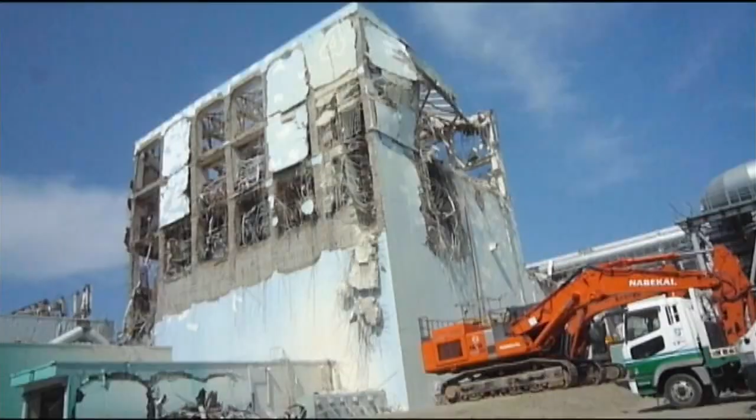To avoid another Fukushima, we should close all nuclear plants. Like the rest of the world, Japan is at a crossroads. Can they get along without nuclear? Sure. The price is going to be very, very high for them. Wind and solar are not going to run the Ginza lights.

How will we power the planet without wrecking the climate? If you really do wish to do something about climate change, nuclear is the path. We don't use nuclear because we got freaked out in the 70s. There are some innovative ideas on the drawing boards.

For my generation, we are much more concerned about climate change and global warming. We're not going to rule anything out because the issue is so important. But given its checkered past, how realistic is atomic power? Are we ready for the nuclear option? Right now on Nova.

Breaking news, a violent earthquake off Japan's northeast coast, an 8.9 earthquake in Japan. It began with an epic earthquake at sea, which spawned a giant tsunami. A 45-foot high wall of water. It rolled over the Fukushima Daiichi nuclear power plant, triggering a cascade of failures.

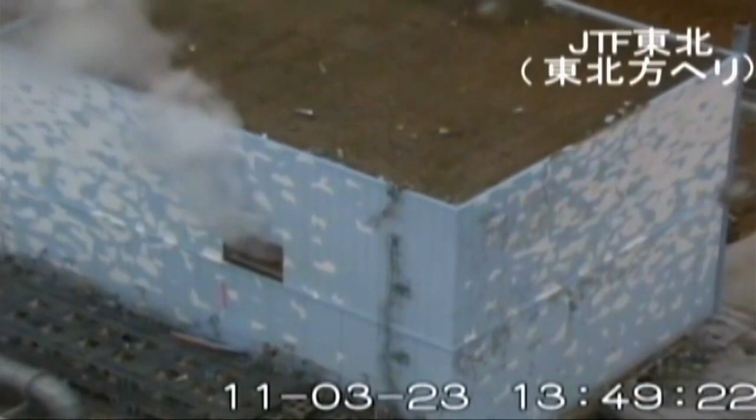3 hydrogen gas explosions. 3 meltdowns. The uncontrolled release of radioactivity into the ocean and into the air. It contaminated a huge swath of land, prompting the evacuation of more than 100,000 people in a 12-mile radius. The worst affected areas, northwest of the plant, remain off-limits, abandoned. No one will be able to live here for a very long time.

As the groundwater passes through the plant, it gets mixed in with the contaminated water that is... It's now been nearly 6 years since the meltdowns at Fukushima. I've been reporting on this since it happened. 6 trips in as many years. I've traveled up and down the desolate evacuation zone. We are about a kilometer from the Fukushima Daiichi plant, getting particularly high readings here, 34 microsieverts per hour.

Victims who lost so much in the earthquake and tsunami in limbo, unsure when or if they can return home. I lost 3 family members, my mother, my wife, and my oldest son. I thought if we fixed the house, we could return here to live. I thought that when we left. But now that I see it, there's no way. No way.

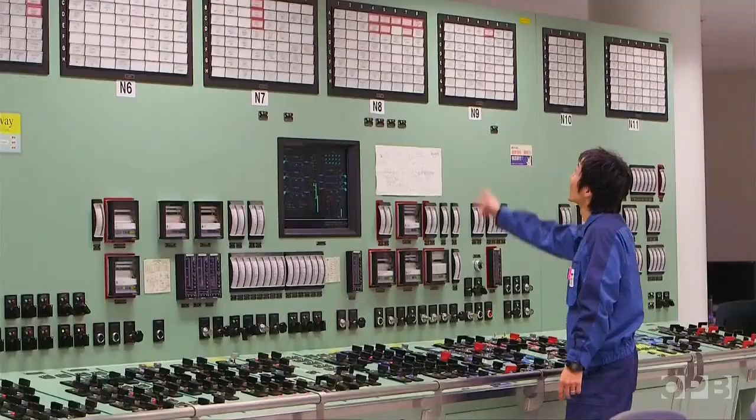The owner of Fukushima, the Tokyo Electric Power Company, or TEPCO, is pushing hard for permission to restart another sprawling nuclear power facility on the west coast of Japan. The Kashiwazaki-Kariwa atomic plant is the largest in the world, or was. Today at KK, the operators are simulating disasters, but the plant remains closed like nearly every other nuclear power facility in Japan.

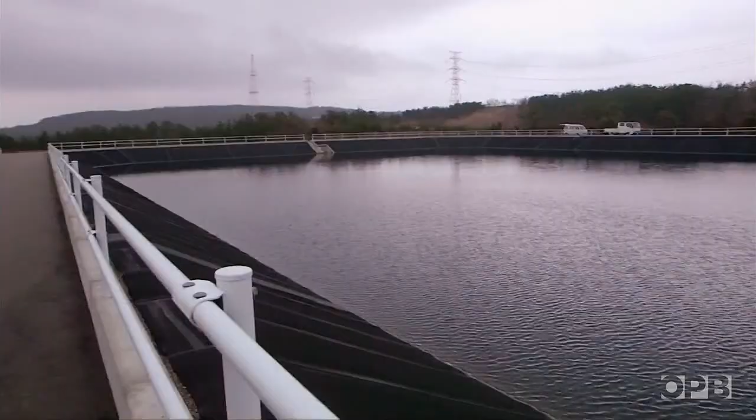After the meltdowns at Fukushima, TEPCO invested heavily in safety upgrades here. A 50-foot-high seawall and watertight doors. On high ground, a fleet of backup generators and fire engines, and a 5 million-gallon holding pond designed to keep water flowing down to the reactor cores as a last resort. The price tag, nearly $5 billion.

Despite all of that, the prefectural governor is opposed to a restart, as are most people who live here. I have young children. In my opinion, nuclear plants should be eliminated. Honestly, I don't want them to resume. With the impact of Fukushima, I don't want to use nuclear plants in the future.

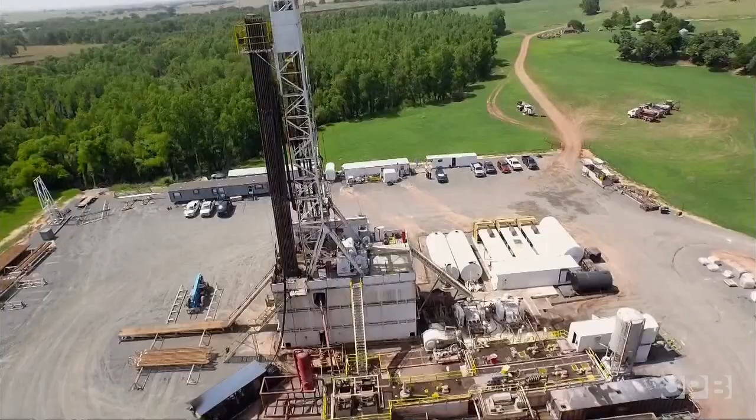Before the Fukushima disaster, Japan derived 30% of its electricity from 54 nuclear reactors. There were extensive plans to build 14 more. The goal? Generate half of their electricity with nuclear by 2030. Now the nation relies on imported fossil fuels to fill the gap. Japan is at a crossroads, and so is the rest of the world. How can we answer the relentless demand for more energy without burning fossil fuels, the chief culprit in global warming?

Unlike fossil fuels, nuclear is a potent source of energy that does not generate any of the greenhouse gases, like carbon dioxide, that trap heat in the atmosphere, warming our planet. A nuclear reactor is fueled by uranium, an element that naturally splits apart, releasing atomic particles called neutrons. It's called fission, and uranium fission can induce more fission. When a loose neutron fires into a nearby uranium nucleus, the atom becomes unstable and quickly splits.

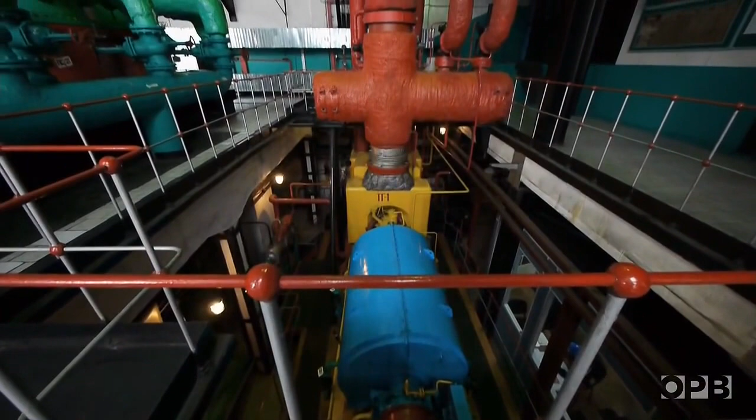Each time an atom splits, it generates heat. It's used to boil water. The steam turns turbines, generating electricity without releasing any carbon dioxide into the atmosphere. Renewable sources of energy may seem like safer, simpler ways to generate carbon-free power. But without a practical means of storing what they produce, are they reliable enough?

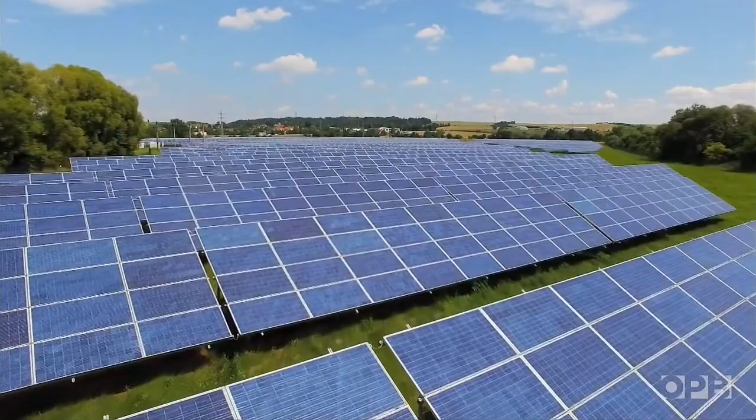We expect electricity on demand. What happens when the sun doesn't shine? What happens when the wind doesn't blow? We don't have a battery technology that can meet the rigorous performance requirements of the grid, namely super low cost and super long service lifetime.

Wind and solar have been growing rapidly, but we have so little storage now that even if it grows very rapidly, it'll be a long time before it has a big impact. We need to have baseload carbon-free power. And nuclear is a great example of something that is baseload carbon-free power.

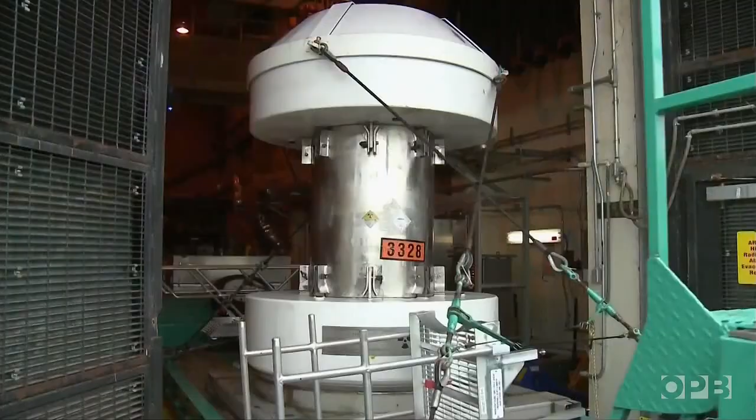But since the dawn of the nuclear age, that signal means to stop whatever you are doing and get to the nearest safe place fast. Fear of atomic bombs, radiation, and concerns about storing the radioactive waste have made nuclear power seem too risky.

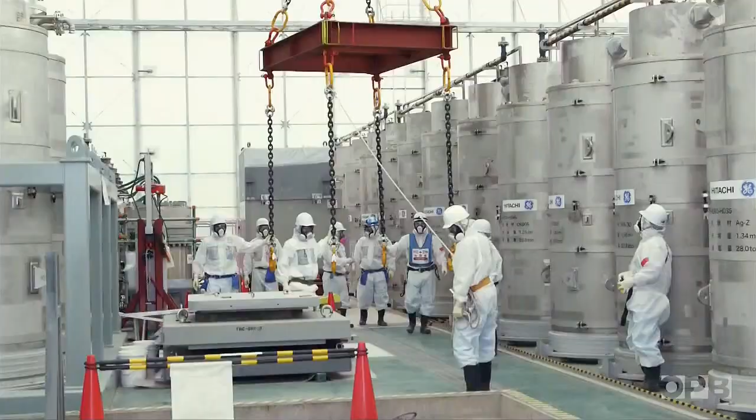Radioactive contamination has gone down, but not nearly enough to dispense with the Tyvek suits, 3 layers of socks, and gloves, and full-face respirators. 4,000 workers endure the ritual every day. They work long and hard without access to water or a toilet. It's like being an astronaut on a spacewalk. But this mission is less scripted and rehearsed. There is no playbook.

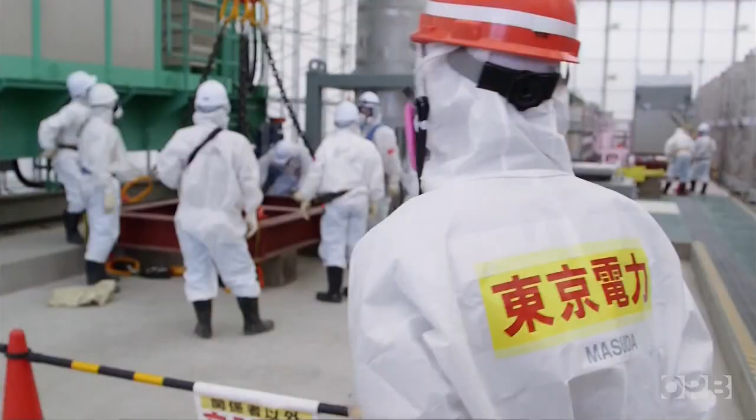The biggest challenge is that we've never done anything like this. No one in the world has this experience. Naohiro Masuda is TEPCO's chief decommissioning officer, the man in charge of this unprecedented cleanup. It's neither a job he sought nor could have imagined when he began working for the utility 30 years ago. My generation joined the company to generate electricity with nuclear power. That was our purpose in life.

So when it comes to decommissioning work, I feel there's a bit of a dilemma, like, what is our goal here? And we still need to decide what we're going to do. For that, we need to rely on the knowledge of people around the world. He relies heavily on this man. For them to come out and to publicly say we need help is different for them.

Lake Barrett is one of a very select group who has some experience with a job like this. It was an accident at the Three Mile Island nuclear power plant, which is... The Nuclear Regulatory Commission appointed him to manage the decommissioning of Three Mile Island Unit 2 after it melted down in 1979, releasing a negligible amount of radiation into the atmosphere.

There's a lot of similarities between TMI and Fukushima, and there's also a lot of differences. Fukushima is much more complex, the damage is much greater, there's 3 melted cores, but the fundamentals of how you address this and how you recover are similar. We are now 5 feet into the core. Boy, a lot of debris.

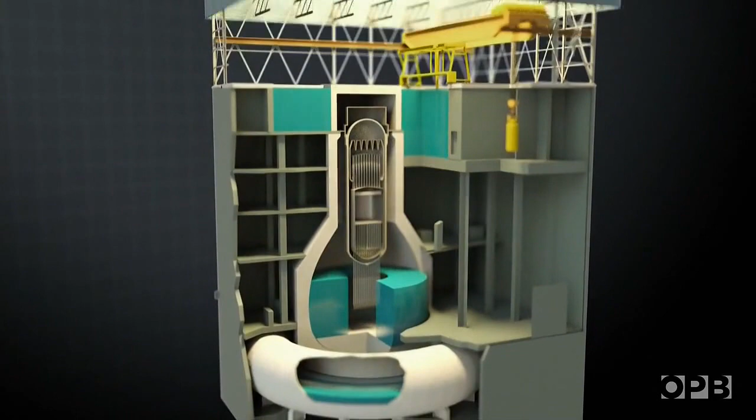So where is the melted fuel at Fukushima? In the type of reactors that were built there, the uranium fuel sits inside rods, underwater, in a steel pressure vessel, surrounded by a concrete and steel containment structure inside a reactor building. All those layers of protection are there in case the cooling water stops flowing. If that happens, it quickly boils away, exposing the fuel, and it melts, turning into radioactive magma.

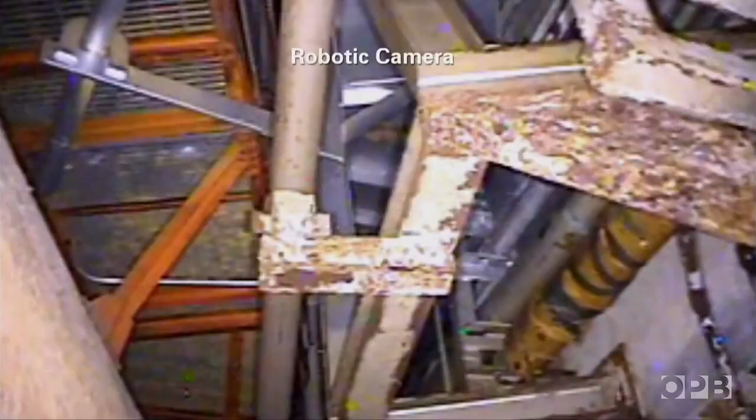Engineers have sent robotic cameras into the containment structure to try to get a glimpse. But the cameras quickly fail after they are bombarded by radiation. They do know the damaged cores are inside their containment structures, but it is likely that they melted through the reactor pressure vessels onto the concrete floor below.

Is it in one big vertical lump on the floor underneath it, or did it come down and flow like lava in a volcano and move out to the sides? We don't know yet. Answering the question won't be easy. It's just too hazardous to get anywhere near the melted fuel.

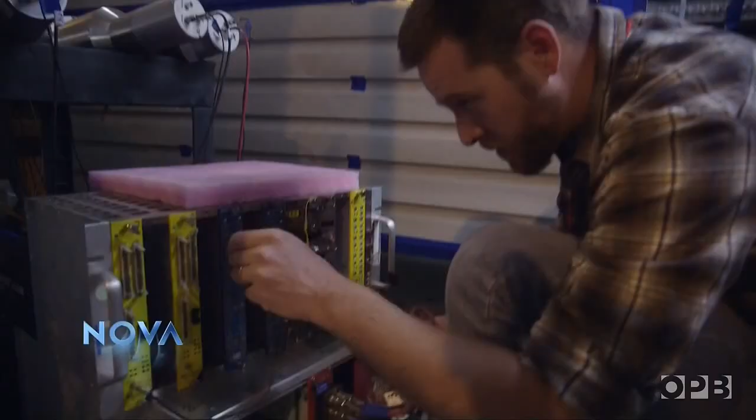But a team of scientists and engineers from the Los Alamos National Laboratory is helping TEPCO get some answers.

Channel 7's on. Channel 7's on.

They are building a sensing device that detects muons, which begin as subatomic particles in outer space before reaching the Earth's atmosphere. They can be used as a tool to see the melted uranium fuel. Muons are stopped, slowed, or deflected, depending on the density of the matter they are passing through. Muons are like heavy electrons. They don't have a nuclear interaction.

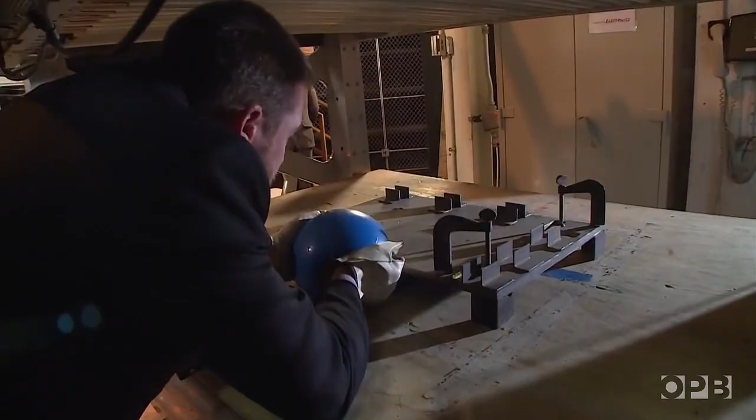In this demonstration, they used muon detectors to create an MRI-like image of this half-sphere of lead. At Fukushima, muon detectors like these, placed strategically around the very dense uranium cores, can work together to pinpoint the location and shape of the melted fuel. The technique works in simulations.

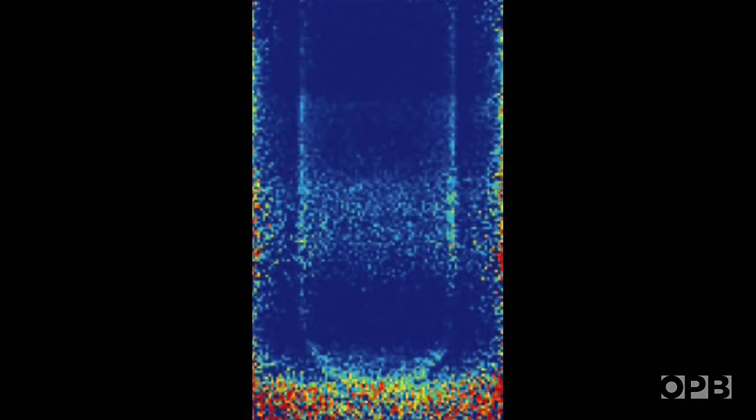We can see where the core was, we can see the bottom of the pressure vessel, and we can see if there's material in the core region, if there's material that's in the bottom of the pressure vessel. And we can actually measure if there's any uranium there, if there's a lot of uranium there, how much is left. So this is really good news.

The detectors will be run for months to gather sufficient data to give engineers the sharpest possible picture inside a lethally hazardous place that none of them can ever visit. At Fukushima right now, the most urgent problem is water. A steady torrent of radioactive water.

The plant is wedged between a mountain range and the Pacific. When the rain falls, it flows toward the ocean on the surface and underground. The earthquake on March 11, 2011, created numerous breaches in the basements of the reactor buildings. To keep the melted uranium cores cool, TEPCO pumps in 100,000 gallons of water each day.

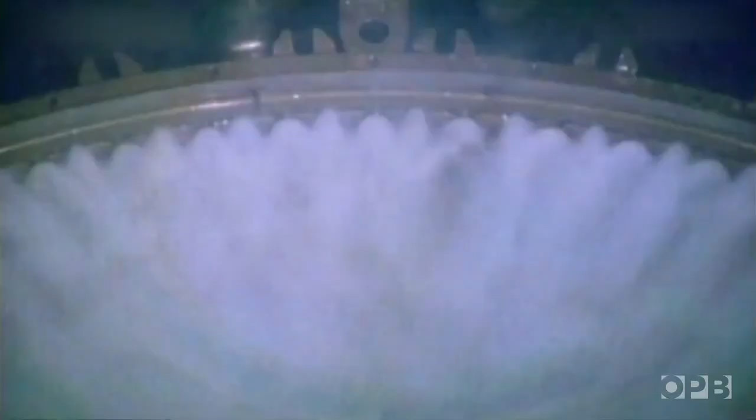The water touches the core, becomes highly contaminated, and flows out through these penetrations that are leaking onto the floor of the reactor building. That's where it mixes with groundwater that has seeped into the basement. 100,000 gallons of water is contaminated each and every day.

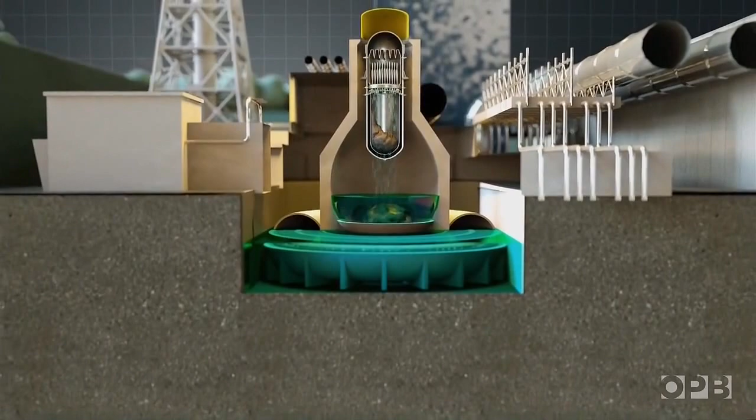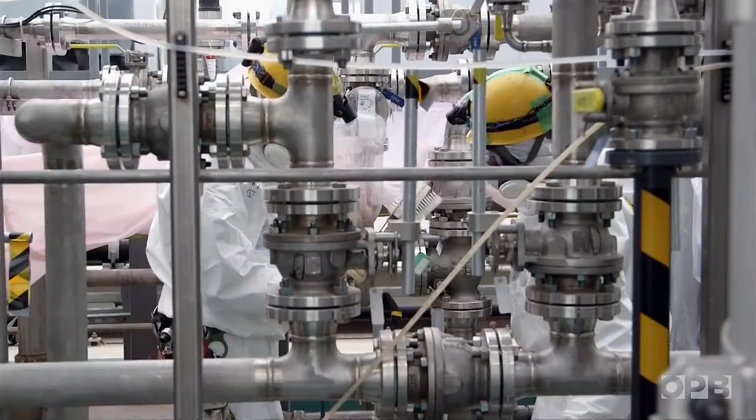To keep it from leaking into the ocean, they employ a network of pumps, sending the water through a series of huge filtering plants that use various types of fine-grained materials that naturally attract and bind with radioactive elements. They remove cesium, strontium, plutonium, and about 60 others. All that remains is a radioactive form of hydrogen called tritium.

Tritium is very hard. It's in water itself. That's something that you just can't remove by any methods that I know of in a straightforward way on that scale. So they're going to have to release it. Dangerous as that may sound, scientists say the risk is relatively low. Tritium was not released in very high quantities from Fukushima relative to what we released in the atmosphere in the 1960s when we blew off hydrogen bombs.

There was a lot of tritium put into our ocean, so we're going to be adding in a small amount of tritium to an ocean that already has tritium in it. In the meantime, they are storing the tainted water in tanks. Lots of tanks. They have to finish construction of a new one about every other day to keep up.

A plateau above the destroyed reactors now brims with more than 1,000 of them. They hold more than 264 million gallons of water. While TEPCO has enough space to keep building them for years, it is clearly not a sustainable solution. And yet the government has refused to issue a permit that would allow the utility to drain the tanks.

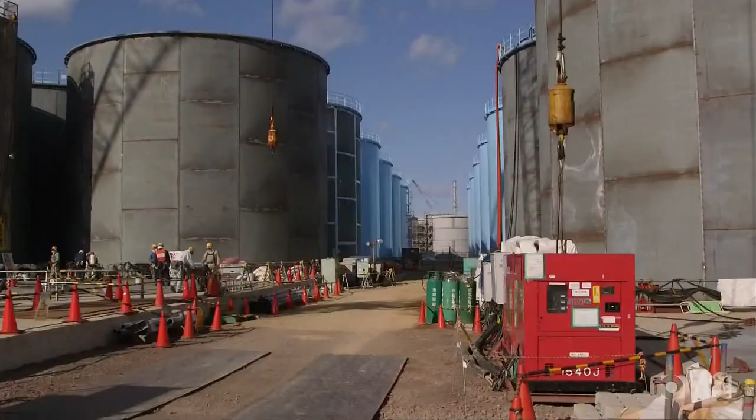To get there, they're going to have to rebuild the public confidence that they understand and trust the people that are telling them these messages, and ultimately that people realize you can't just keep building tanks, right, forever. There has to be a limit. Meanwhile, TEPCO is desperately trying to reduce the amount of groundwater that becomes contaminated in the first place.

They have encircled the damaged reactors with 1,500 pipes that go 100 feet deep. They are filled with coolant that is 22 degrees below zero, creating a mile-long underground barrier of frozen soil. The hope is it will deflect the groundwater away from the melted fuel. But why ice?

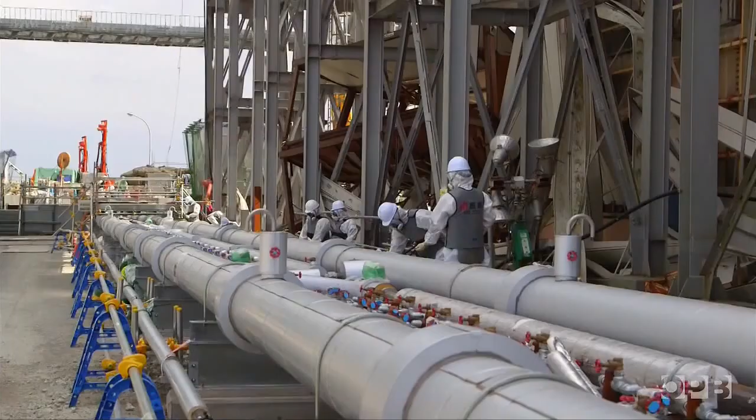When my boss told me that I was being assigned here, I had my doubts. But there are a large number of buried pipes and cables around the nuclear reactor buildings. So it's not possible to use a continuous wall of steel or concrete underground.

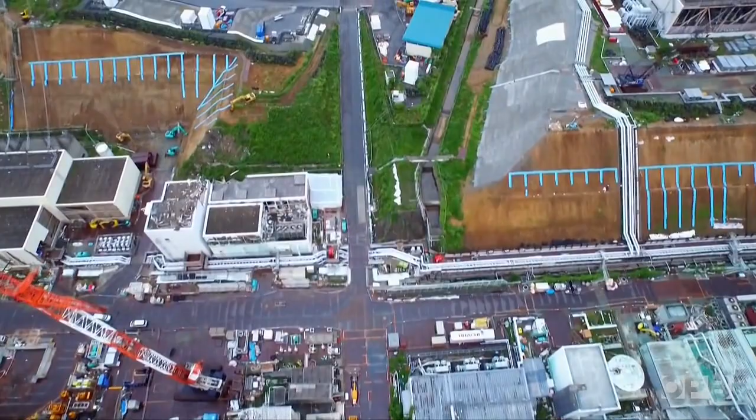The technique is routinely used on construction sites to temporarily stabilize the ground. But nothing at this scale, designed to work for years, has ever been tried before. My concern is if you have water flowing through the site and you build a barricade, does TEPCO really understand where that water goes? Is it going to go over the wall? Is it going to go under the wall? Is it going to go around the wall?

In March of 2016, they turned it on, but the groundwater is still seeping in. No one knows if it will ever work. The engineers here face huge challenges ahead. The job won't be finished for 30 or 40 years. Nothing of this magnitude has ever been done before. It can be done, I believe, with the technologies that exist and will be developed as we go forward. But no, nothing of this magnitude has ever been done by mankind.

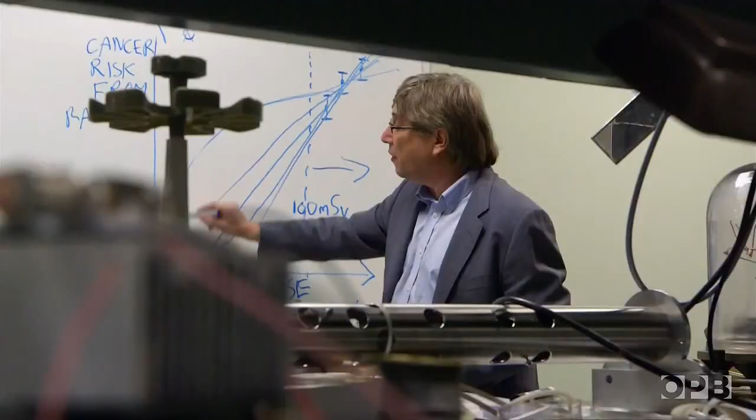They are being watched by a scared, skeptical populace. And unfortunately, scientists can offer little reassurance. Biophysicist David Brenner is director of the Center for Radiological Research here at Columbia University Medical Center. In my opinion, everybody who lived in Fukushima Prefecture and even outside who got some very low level of radiation exposure, and that's pretty well everybody, would be subject to a very small increase in cancer risk.

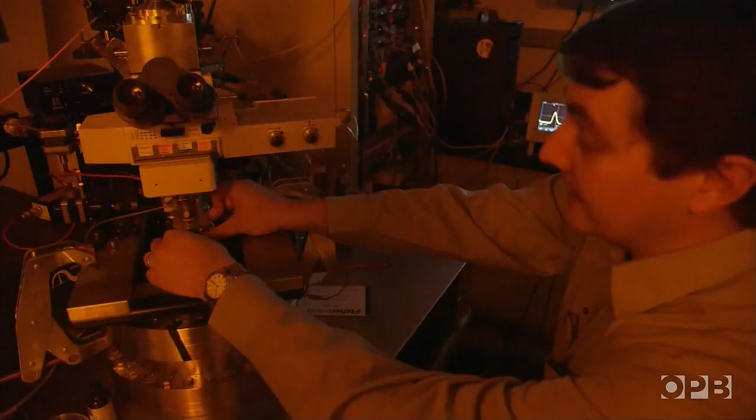But beyond that, scientists cannot say anything conclusive about their long-term risk of developing cancer or genetic defects. The individuals in Fukushima Prefecture want to know what are the real effects of the radiation that I was exposed to. And we can't give them the answers that they need, and that's a really unfortunate situation. I personally find it a very frustrating situation. About 18,000 people died as a result of the earthquake and tsunami on March 11, 2011. But no one has died by radiation from the meltdowns.

So is the lesson of Fukushima to stop or to build better, safer nuclear plants? Plants that employ a host of new technologies that matured long after most of our current fleet of nukes was designed. I think the right interpretation of the accident at Fukushima is we should go all out on nuclear innovation. If the Japanese had replaced these elderly plants with modern plants, Fukushima wouldn't have happened.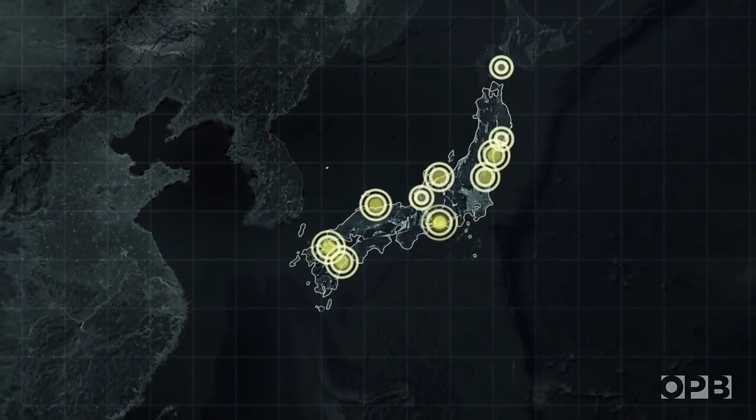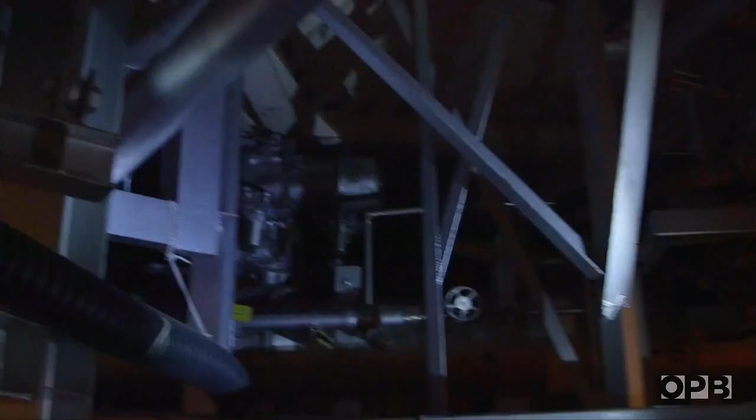In all, there are about 450 nuclear reactors generating 11% of the planet's electricity. In the US, nuclear power fills about 20% of the nation's power demand. The vast majority of nuclear power plants were built with technology and techniques from the 60s and 70s and are water-cooled. Despite steady improvements over the years, water-cooled reactors still have a serious vulnerability: a station blackout that stops the crucial pumps that keep cooling water flowing. This is what happened at Fukushima.

To make fission robust enough to generate power, uranium is enriched, shaped into pellets, and then stacked into fuel rods. This ensures lots of uranium atoms are close enough to each other to allow a healthy chain reaction. To manage the rate of the reaction, control rods that absorb neutrons are moved in and out of spaces among the fuel. During an emergency shutdown or scram, the control rods are pushed all the way in, terminating the chain reaction.

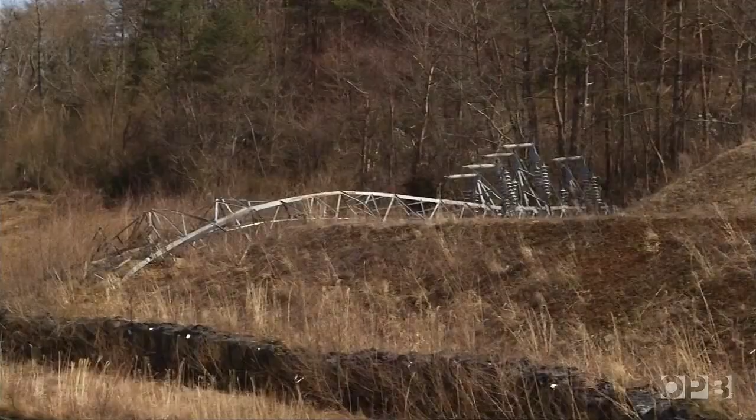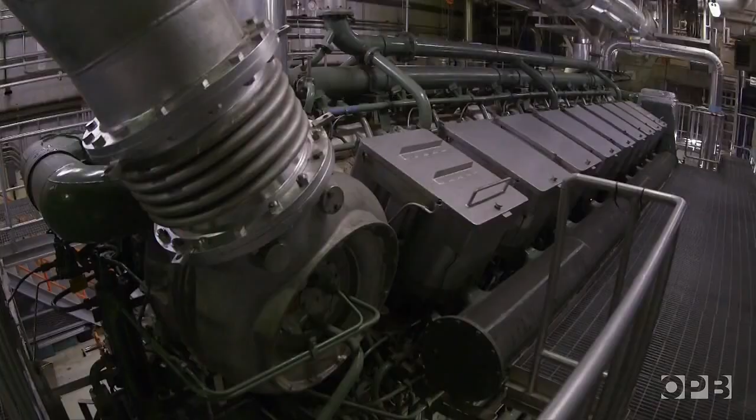The earthquake of March 11, 2011 prompted an automatic scram at Fukushima. But it also brought down the crucial transmission lines that connected the plant to the power grid. Then the tsunami waves wiped out the emergency backups, the generators and batteries designed to keep electric pumps pushing water over the reactor cores while they cooled down. Currently, the existing fleet of reactors use pumps and diesel generators and AC and DC power to provide the cooling to the nuclear reactor core. If you lose connection to the grid, essentially you have no way of cooling that core.

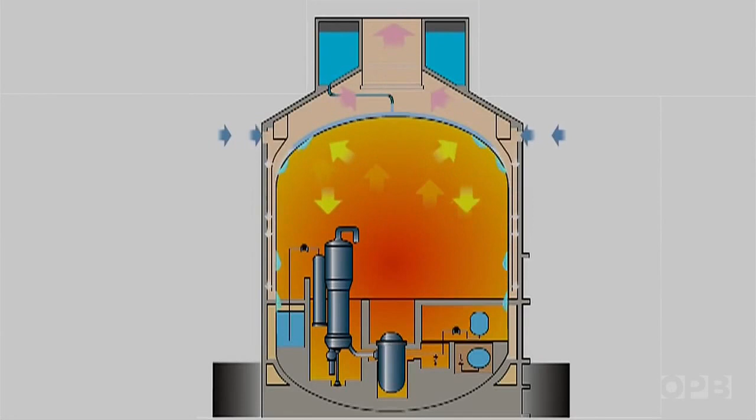Some of the results from that... Jose Reyes is a nuclear engineer at Oregon State University. In the early 2000s, he and his team partnered with Westinghouse Toshiba to design the prototype for a new generation water-cooled nuclear reactor called the AP1000. It has an emergency water reservoir above the reactor. It is designed to prevent a meltdown for as long as 72 hours, using gravity and convection, but no electricity. If the reactors at Fukushima could have coped for that long, the meltdowns would not have happened. 4 of these AP1000s are now under construction in Georgia and South Carolina, and 4 more in China.

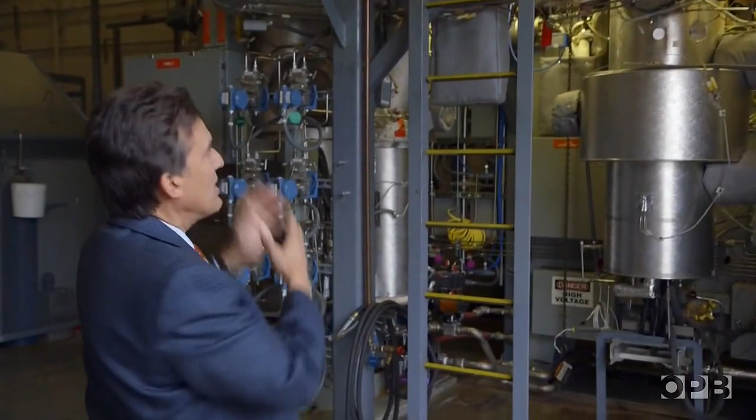So what you're looking at here is the reactor vessel in the center. But more recently, Reyes is focused on smaller, and he thinks better things. He is the co-founder and chief technology officer for an Oregon-based company called NuScale.

In our design, the reactor vessel sits inside the containment, and then that whole system, the containment and the reactor vessel, sits underwater, underground. And that's the whole safety system for this plant. NuScale reactors are small and modular, designed to be operated in clusters, completely submerged in a 4 million-gallon pool of water. Each can generate about 50 megawatts of electricity, enough to power nearly 40,000 homes.

So 12 of them linked together could service 450,000 homes, or about as much as a conventional nuclear power plant. As we've gone through the patent process, some of the patent examiners have said, this is too simple. How is this possible that this hasn't been done before?

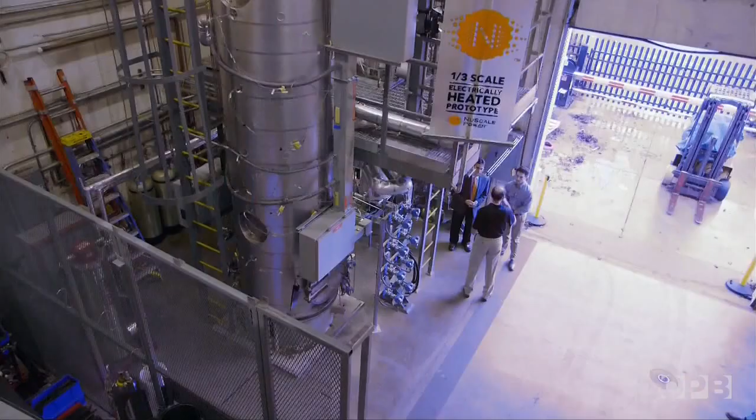Unlike Fukushima, where critical coolant pumps had to keep running for the reactors to cool down, NuScale has designed a plant that requires no pumps and no electricity at all. So a lot of these are tied to actual valves. Okay. Right now, they are still trying to validate the concept and clear the massive regulatory hurdles.

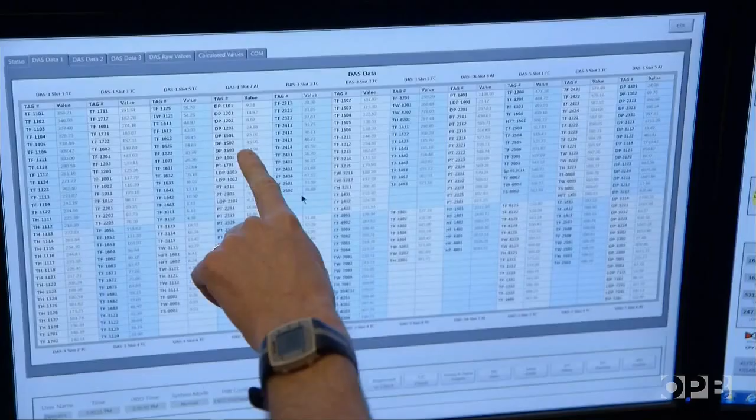It will take many years, but NuScale already has a customer, the Utah Associated Municipal Power Systems. The plant will actually be built across the state line in Idaho, at the federal government's premier nuclear power test site, a storied place emerging from a long nuclear winter.

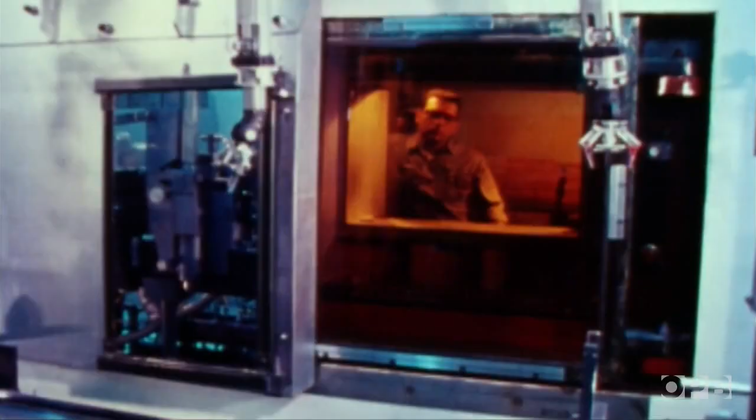When I came to Argonne in 1963, I was then 28, 29 years old. The world was my oyster. When Chuck Till first came to the Argonne National Laboratory, it was a great time to be a nuclear physicist, a golden era. A lot of things had been discovered, but very many had not. The things that would be necessary for civilian nuclear power to be a success basically had not been explored. And at Argonne, you were right in the center of it.

Argonne's vast testing site in the Idaho desert is ground zero for nuclear power generation. More than 50 novel reactor designs have been built and tested here since 1949. It is hallowed ground for nuclear engineers. The beginnings of nuclear power were here. The beginnings of useful nuclear power were here.

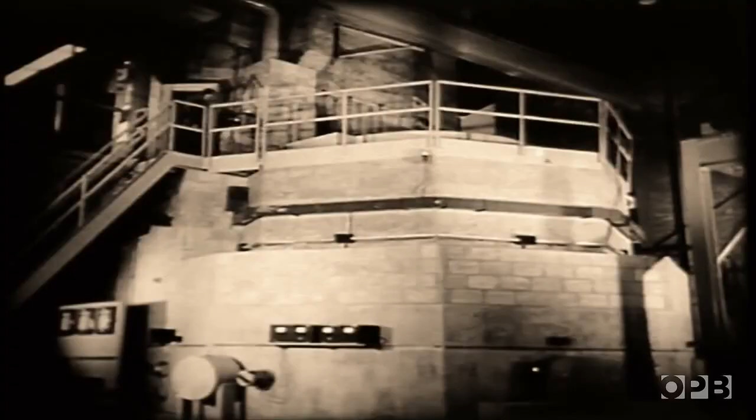At 1:50 p.m. on December 20th, 1951, four 200-watt light bulbs started burning here with electricity generated by the experimental breeder reactor number 1, the first ever nuclear power plant. Besides the fact that it proved splitting atoms could generate power, it also demonstrated a very clever way to do it.

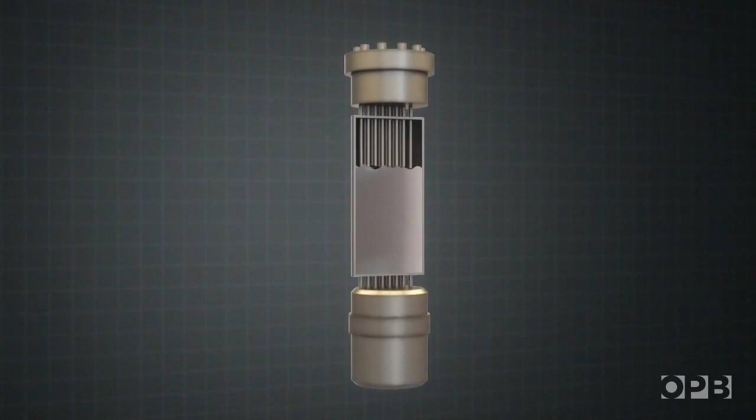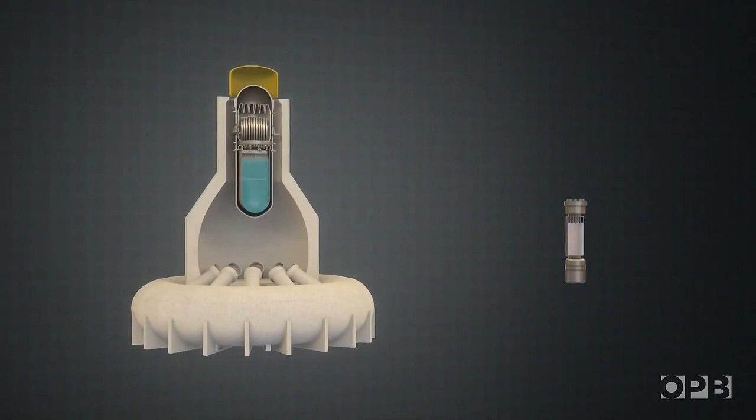The fuel was cooled with liquid metal, sodium mixed with potassium, which has a low melting point. It absorbs more heat and has a much higher boiling point than water. It meant the reactor did not need to be encased in a thick steel pressure vessel designed to keep water in liquid form like a pressure cooker. It was inherently safer, or so the scientists hoped.

They built this reactor to test the concept, experimental breeder reactor number 2. The experimental breeder reactor number 2 is a reactor that's known to all nuclear programs around the world. It is a full-scale plant, and it proved all kinds of firsts in nuclear power. It's now about 5 minutes till test time.

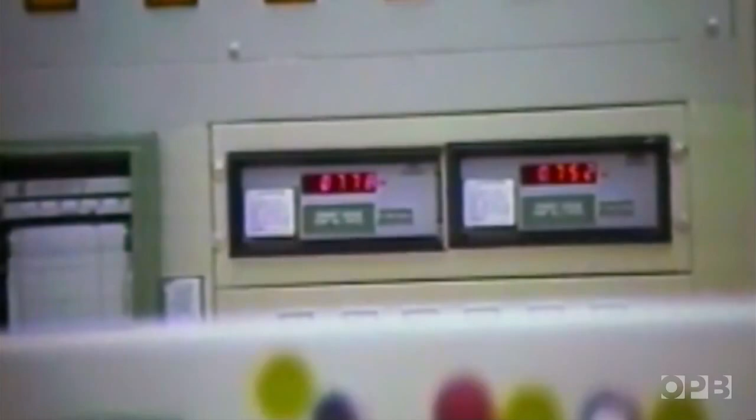It made history on April 3rd, 1986. 1 minute till the test. When they staged a bold demonstration of how a liquid metal reactor can handle multiple failures. 3, 2, 1, start. In the turbine hall was an assemblage of people that came from all over the world. They had nuclear programs, and they wanted to see this because the reactors don't behave this way. Reactors can't be relied upon to shut themselves down.

The first demonstration foreshadowed Fukushima, a station blackout and a loss of coolant flow to the hot nuclear core. Mark! They just shut off the coolant supply. And I mean, do that in a normal reactor, you'd have an explosion. You could see the power going straight up. The next thing, of course, is everybody's head swiveled back to where we were, the Argonne people were, wondering, are they running?

The demonstration went as hoped. The power trace went up like that, came down well below where it had to come down, and the reactor just quietly shut itself down. Deprived of any cooling, this reactor did not melt down or explode. But how?

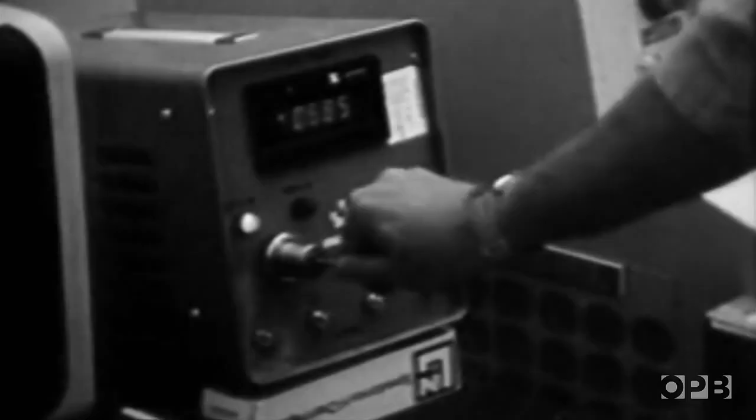Remember, to sustain a healthy chain reaction, uranium atoms must be close enough to each other so the neutron bullets can hit their targets. When the liquid sodium coolant pumps stop, the temperature initially rises, expanding the reactor core, dispersing the uranium atoms. As a result, the chain reaction is reduced, causing the temperature to go down. So the laws of physics and the robust cooling capacity of liquid sodium metal bring it automatically to a safe shutdown.

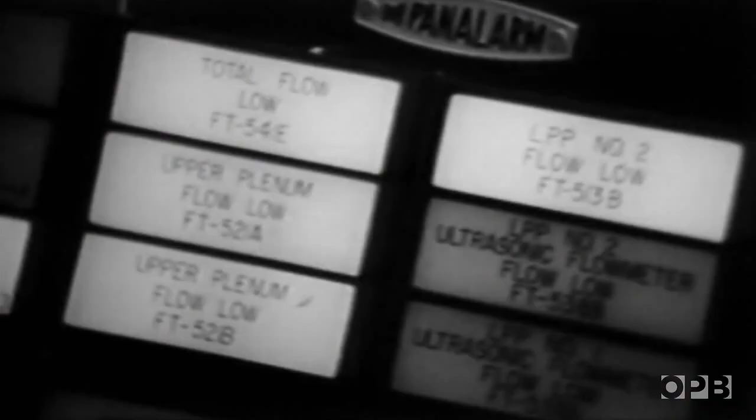At the time of that dramatic test, Chuck Till thought this was the dawn of a new era. He envisioned widespread commercial use of sodium reactors based on this design. Absolutely. The world was going to need massive amounts of energy, and here was the way. There was no doubt. Sodium-cooled reactors, properly designed, are safer. I say that without question. So why don't we have them? We were stopped.

There has been a nuclear accident at the Chernobyl atomic power plant.

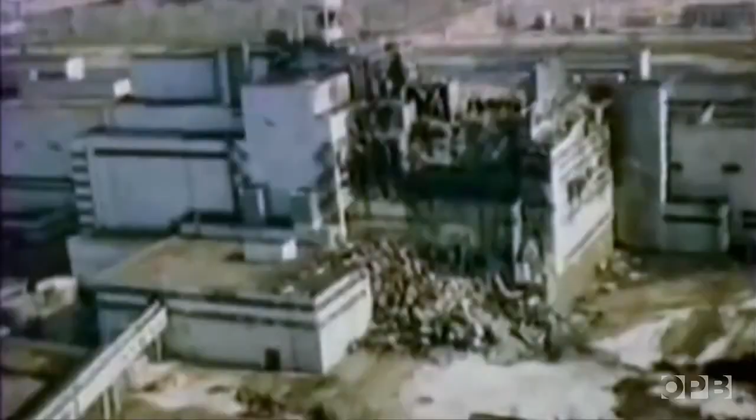A few weeks after that demonstration, a reactor at the Chernobyl nuclear power plant in the Soviet Union blew up during an ill-conceived test. Chuck Till's success was totally eclipsed. All right.

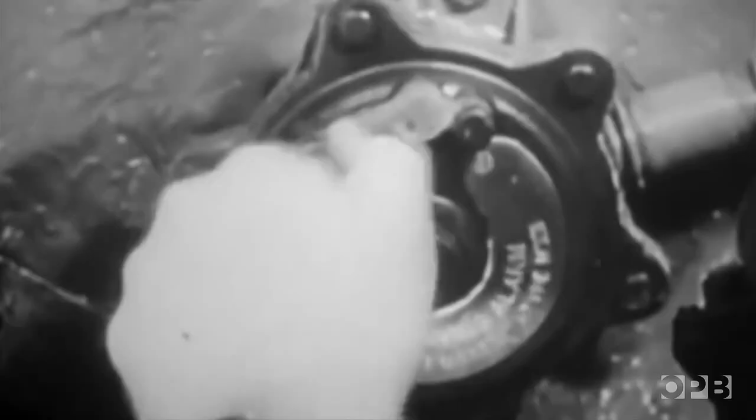This is a model of the Navy's first nuclear-powered submarine, the Nautilus. But the seeds of the demise for sodium reactors were planted many years earlier by this man, Admiral Hyman Rickover, the father of the nuclear navy. This is the reactor, or the atomic pile. There's uranium in here. He selected nuclear reactors cooled with water to propel the Nautilus, the first nuclear-powered submarine. The design made a lot of good sense for the Navy. It was the right mix of size, simplicity, and safety. Among other things, sodium explodes when exposed to water. The huge Pentagon investment in the research and development of this technology gave it a big leg up on other ideas, including liquid metal reactors.

About the same time, President Eisenhower delivered his famous Atoms for Peace speech at the UN. So my country's purpose is to help us move out of the dark chamber of horrors into the light. He hoped to change the way the world thought about splitting atoms, from bombs to light bulbs. He wanted to export U.S. nuclear power technology, and he was in a hurry to beat the Soviets. Adapting the nuclear Navy technology for use on land offered the fastest path to market.

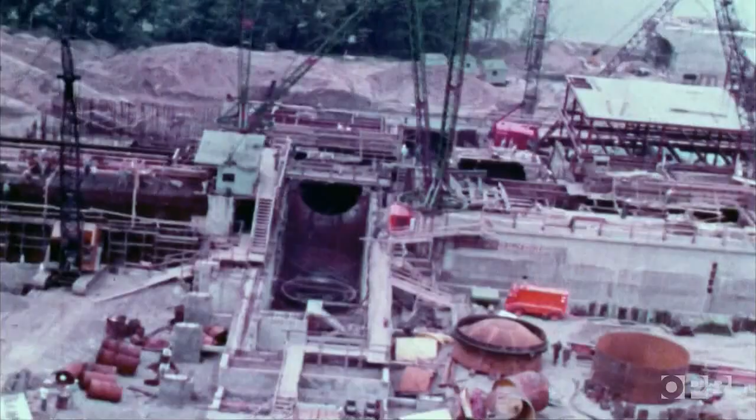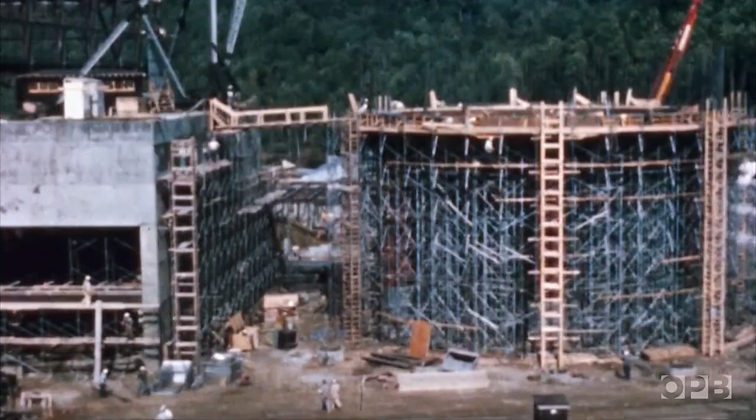In 1957, the first commercial atomic power plant in the U.S. opened near Pittsburgh, in Shippingport, Pennsylvania. Admiral Rickover personally oversaw the design and construction. Very quickly, reactors cooled with water became the norm. For 20 years, utilities went on a nuclear building binge. But then, in the 1970s, environmentalists took aim at nuclear power. The fear of radiation and the inextricable link to atomic weapons and their proliferation changed the equation. Protesters viewed nuclear power as inherently unsafe, too complex, and costly. And indeed, as the safety regulations increased, so did the cost of building the plants.

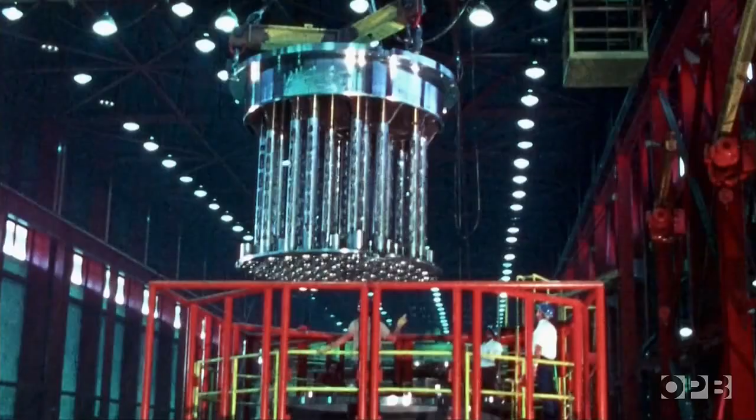The Achilles heel of nuclear power is that you can't protect against every conceivable accident. You can put a lot of extra safeguards into place and really lower that uncertainty as much as you can, but that will raise the cost of nuclear power when it's already unaffordable. By the mid-70s, the Atomic Energy Party was winding down. And then came the movie.

This is Jack Godell. We have a serious condition. You get everybody into safety areas and make sure that they stay there.

The China Syndrome premiered on March 16, 1979. It is the story of an evil corporation cutting corners, leading to a nuclear meltdown.

The number of people killed would depend on which way the wind is blowing. Render an area the size of Pennsylvania permanently uninhabitable, not to mention the cancer that would show up later.

12 days later, in Pennsylvania, life seemed to imitate art at Three Mile Island. The seriousness of the meltdown there unwittingly embellished by Hollywood. Support for nuclear power evaporated. Still, in the Idaho desert, Chuck Till's EBR-2 kept going, running safely for 30 years.

Mr. Speaker, the President of the United States!

But it was better at sustaining fission than political and popular support. The program was canceled by President Clinton in 1994.

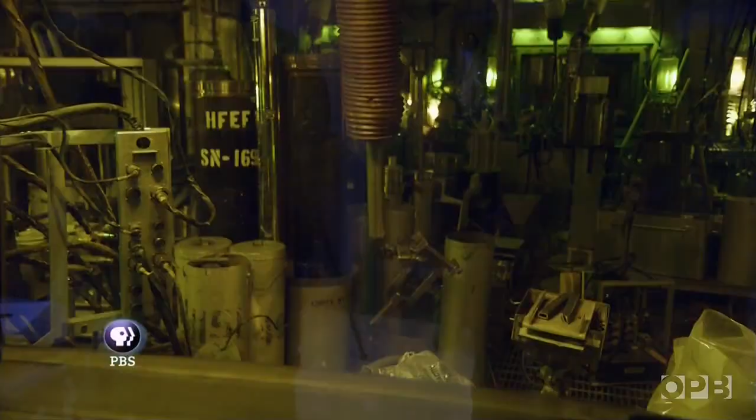But now, more than 20 years later, the intensive search for carbon-free power is prompting a fresh look at new nuclear technology. In the face of climate change reality, the money is starting to flow in this direction again. The federal government has placed some new bets on nuclear innovation. In Idaho, they are taking some of the old test reactors out of mothballs.

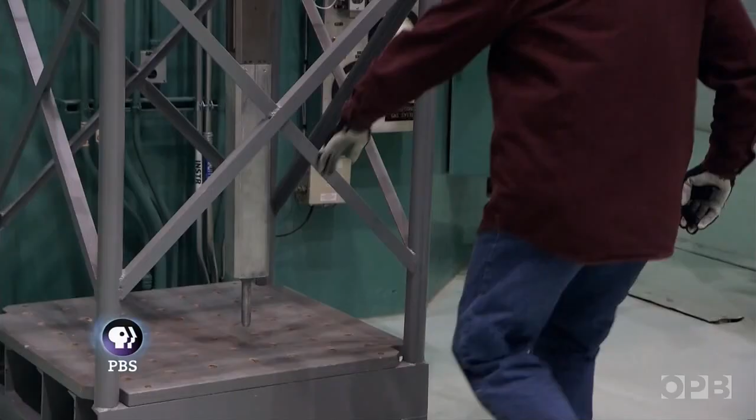The fact that we're restarting that tells us that we're restarting a testing infrastructure to start to develop the next generation of nuclear power. Argonne's test site is now called the Idaho National Laboratory. Its director, Mark Peters, oversees several partnerships with the private sector to improve technology, the state-of-the-art in water-cooled reactors known as Generation 3.

But the main goal is to commercialize Generation 4. Generation 4 are future reactors that are based on different concepts, different core designs, different coolants. I'm quite excited about where we're at today. And so is his predecessor, Chuck Till.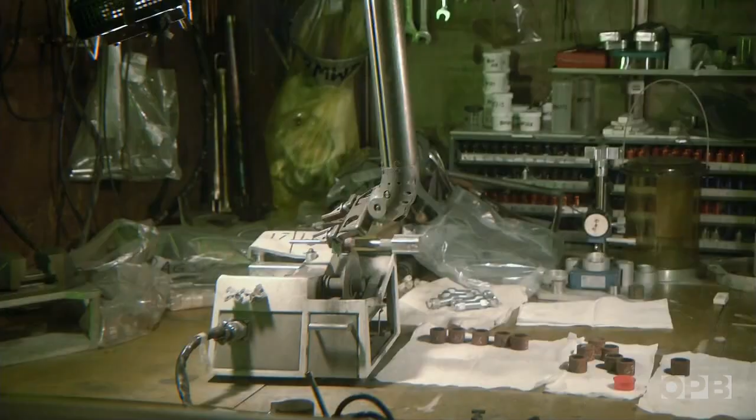It surprises me when I go on the internet and see how many allusions there are to the things that we did. And I hope that the work that my colleagues have done in that decade from 1984 to 1994 pays off. The nation has fumbled around, in my view, for 20 years unnecessarily. But now Chuck Till's vision may finally be gaining some critical mass.

I'm going to talk today about energy and climate. This time, one of the drivers for nuclear power technology is not an admiral, but rather a captain of industry. And so what we're going to have to do at a global scale is create a new system. Microsoft founder Bill Gates is among a handful of entrepreneurs with seemingly bottomless pockets, making big bets on nuclear power. At a TED conference in 2010, he publicly announced he had co-founded a company called TerraPower.

Nathan Myhrvold and I actually are backing a company that perhaps surprisingly is actually taking the nuclear approach. His partner is his former chief technology officer at Microsoft, Nathan Myhrvold. When we first started investing in TerraPower and getting it going, we had a lot of people come and look at us, kick the tires. That was the era when Silicon Valley was into clean tech. And they all said, oh my God, this is risky.

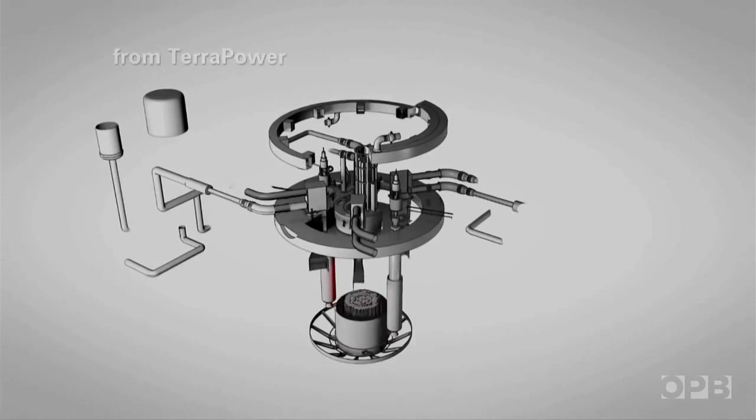But Bill and I thought that it being risky doesn't mean you shouldn't do it. In fact, perversely, that's exactly when you should do it. It's when everybody else says, no, I can't do it. It's something that is a risk that's not for the faint of heart. Here they are working on a 21st century take on sodium reactors.

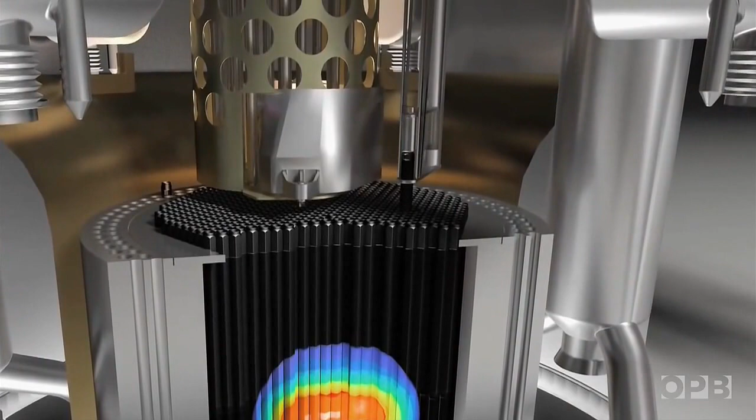It is designed to run without reprocessing and refueling. With a TerraPower reactor, you fuel it, and you don't take them out for 60 years. During that period of time, you'll get enormously more energy out than you would get from the same uranium if you put it in a conventional plant. Unlike water-cooled reactors, this one does not need the equivalent of premium gas, uranium that is refined to greater potency in a complex, expensive process called enrichment.

But the enrichment process has leftovers. The biggest stockpile in the U.S. is here in Paducah, Kentucky, at a uranium enrichment plant. These leftovers, called depleted uranium, can be used to fuel the TerraPower reactor. If this works, it would be a game changer for nuclear power, in part because it would virtually eliminate the need to store spent nuclear fuel, one huge unresolved problem.

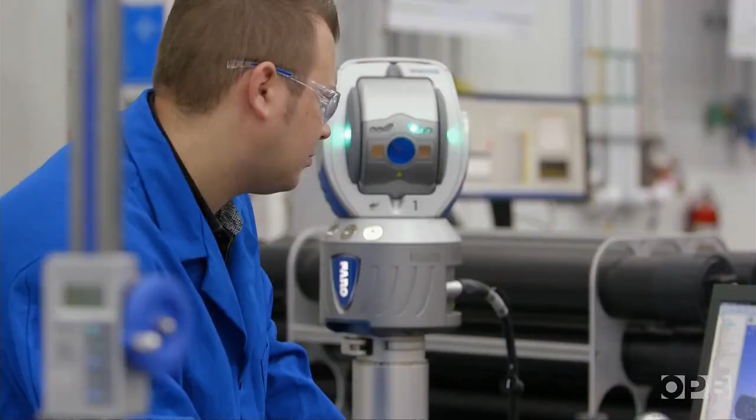With our reactors, Paducah, Kentucky becomes the energy capital of the United States. Because Paducah alone has enough of this low-level nuclear waste, the depleted uranium, that we could run all of America's electricity needs for 750 years. But TerraPower faces big regulatory hurdles.

The Nuclear Regulatory Commission is accustomed to licensing water-cooled reactors. When it comes to innovative technology like this, the rules haven't even been written. So TerraPower has found a customer that is less constrained by regulation and public relations: China. It's where its first plant will be built.

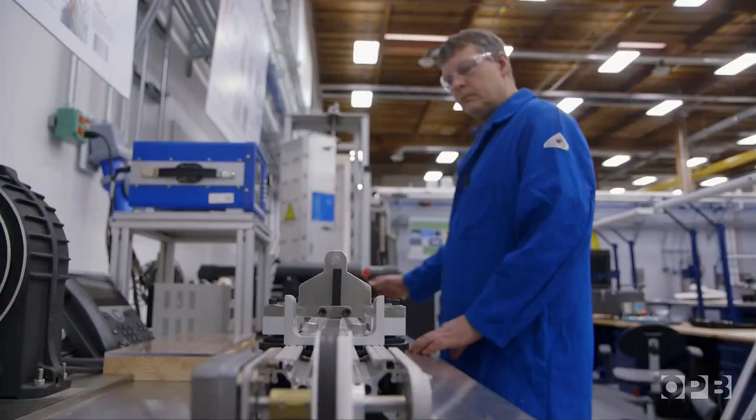So far, from a technical perspective, we've solved every technical problem that's occurred. But I can't tell you, oh yes, we've already been successful. It's going to be many more years of hard work before we are successful. So we made a crazy bet. And we're going to keep making that crazy bet. And I'd love to have more competition. I'd love to say, you know, we're neck and neck with 3 other companies, because that's what moves things forward.

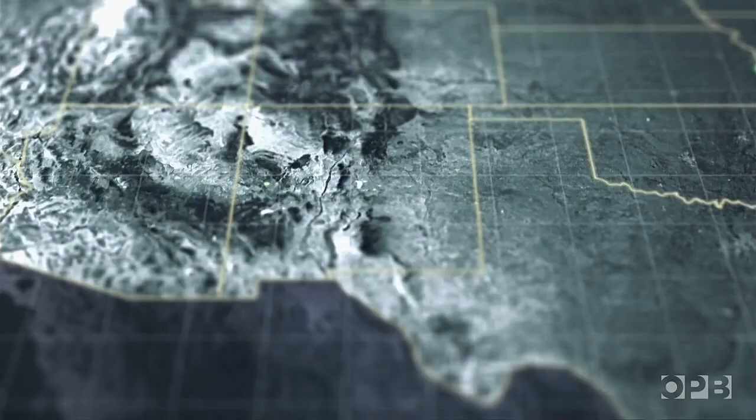It appears Nathan Myhrvold will get his wish. A DC-based think tank, Third Way, conducted a survey in 2015 and found more than 40 startups across the U.S. developing advanced nuclear power designs. These atomic business plans have lured more than $1 billion in investment.

I think a lot of it might just be the changing demographics of nuclear engineers, that now there are a large number of young nuclear engineers who think, I have a really good idea, I'm going to flesh out this technology, I'm going to raise some funding, I'm going to see if I can do this on my own. How much do you have to worry about free fluorine formation? Leslie Dewan is one of the young entrepreneurs leading this revolution. Yeah, because that's what I'm hoping. It's a new generation with a different outlook.

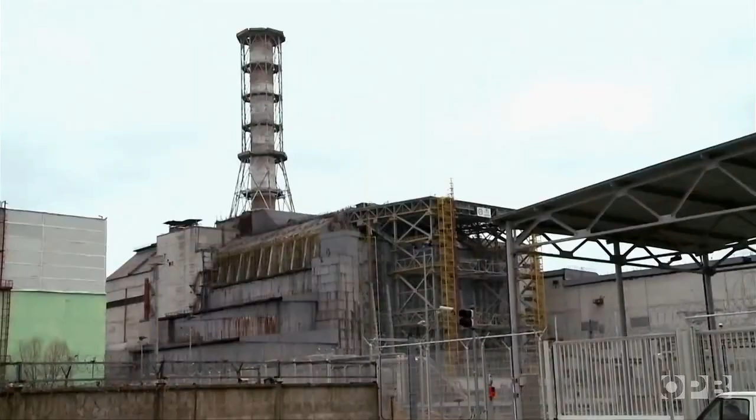Atomic power doesn't carry the same stigma for them. They are more concerned about powering the planet while addressing climate change. All of this led Leslie to MIT to study nuclear engineering. This is a general trend around the world. She was a grad student on the day the tsunami hit Fukushima.

It was especially shocking to me because when I first heard the news, I thought there are overblown media reports, but I trust that everything will be okay. But it went orders of magnitude beyond what I had thought the worst-case scenario accident was going to be. And yet she didn't waver in her goal to build a new kind of nuclear power plant. It made me want to work even harder on developing newer types of reactors that don't have the same cooling requirements and that are even more robust in the case of even more extreme accident scenarios.

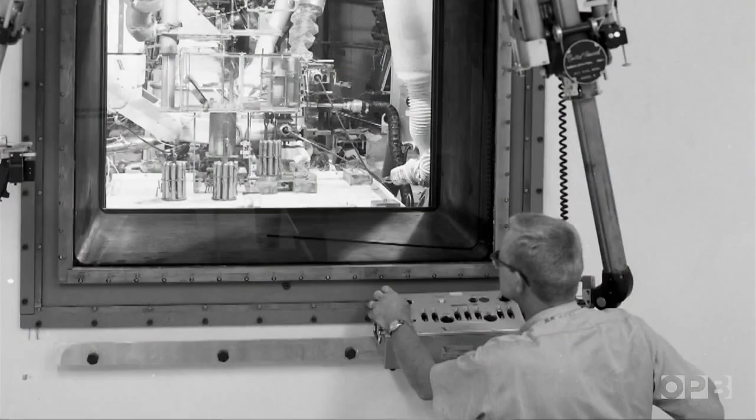She became enamored with some nuclear technology first developed 50 years ago at another national laboratory, this one in Oak Ridge, Tennessee. It's called a molten salt reactor. Not table salt, liquid fluoride salts. Unlike the TerraPower reactor that uses liquid metal to cool solid uranium fuel, this inventive design turns that idea around. A molten salt reactor uses liquid fuel rather than solid fuel.

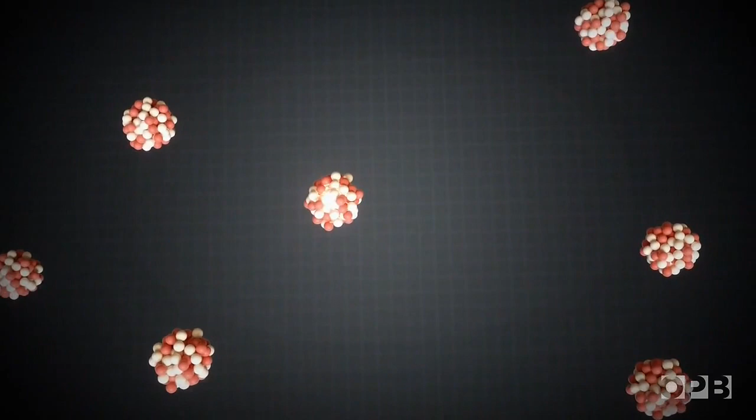With liquid fuel, the size and shape of the container is crucial. Pumping the fuel into a cylindrical vessel places uranium atoms close enough to each other to sustain a nuclear chain reaction. If something goes wrong and it starts to overheat, the liquid expands and the uranium atoms become too dispersed to maintain fission. So it starts cooling down passively.

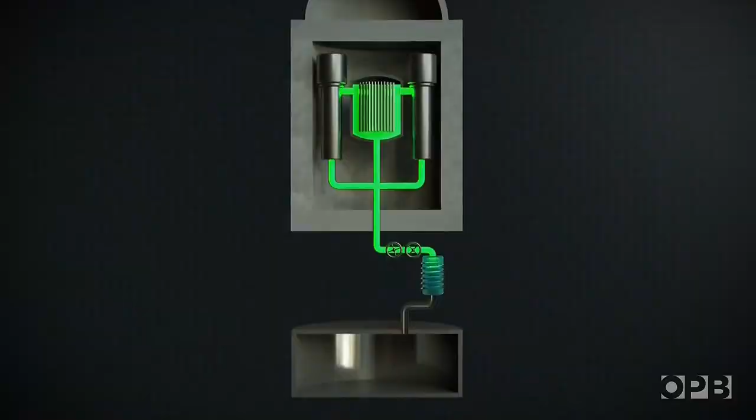And in the case of a total loss of station power, like Fukushima, the design employs another safety feature. Below the reactor chamber is an emergency reservoir. The drain leading to the reservoir is plugged by the same salt mixture, but it is refrigerated so that it freezes solid. Without electricity to keep it cool, the plug quickly melts, and the liquid fuel drains into the emergency reservoir.

Unlike the reactor chamber, the shape and size of the emergency reservoir ensures the uranium atoms are too far apart to sustain a chain reaction. It cools down and eventually freezes. Crisis averted. At Oak Ridge, they successfully ran and tested a molten salt reactor for 4 years. The design works. Even in the worst type of accident scenario, even if you don't have any external electric power, like what happened at Fukushima, even if you don't have any operators on site, they're able to shut themselves down.

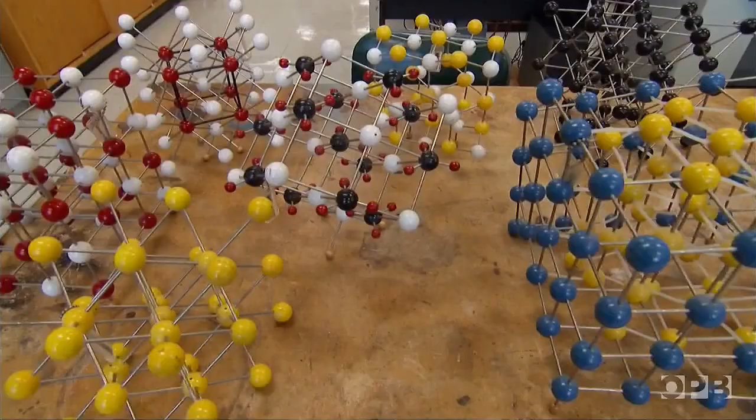The basic science is well understood, but building a reactor that can withstand something as corrosive as a very hot bath of salt is a huge engineering challenge. It is the focus of early testing for Leslie's startup company, Transatomic. We can make something that works for 5 years, that works for 10 years. Like that, we certainly know.

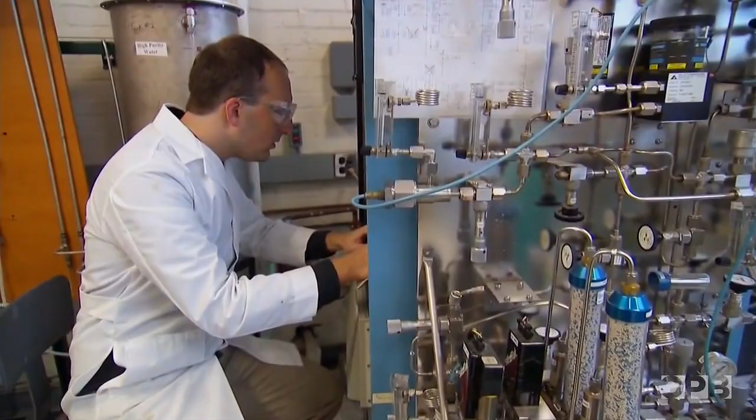What we're trying to figure out now is whether we can use newer materials or new methods of corrosion control to extend the lifetime of the facility, because ultimately, we care about making this low cost. If you have to replace your key components every 10 years, it's not going to be cheaper than coal, and if it's not cheaper than coal, then it's not worth doing.

But coal and all fossil fuels carry another cost to the environment. In Japan, with the nukes mothballed, they have kept the lights burning by burning imported fossil fuels, mostly liquid natural gas. The result? A steady increase in greenhouse gas emissions, reversing the nation's ambitious reduction plan signed just 2 years before the Fukushima disaster. If you're concerned about climate change, you need to be open to nuclear power. I think that there's no way that the world will meet its carbon reduction goals without including nuclear in the mix.

All over the world, the demand for energy grows exponentially in emerging economies. China opens a new coal-fired power plant about once a week. Can the world respond to the relentless demand for energy without worsening climate change? Is it time to rethink the nuclear option? The fate of the whole planet depends on us renewing our energy system with renewables and with nuclear. And if we step back from that, we are going to create a tremendous problem for future generations.